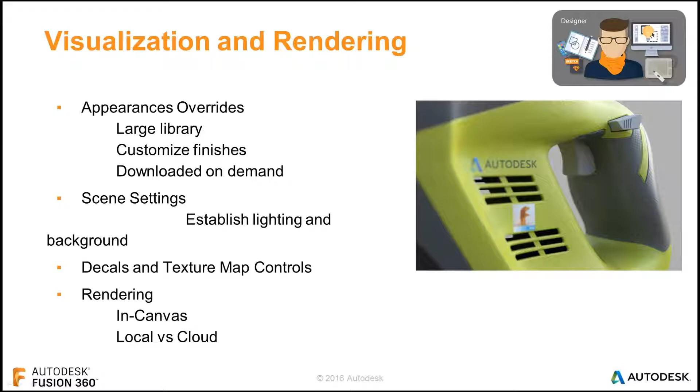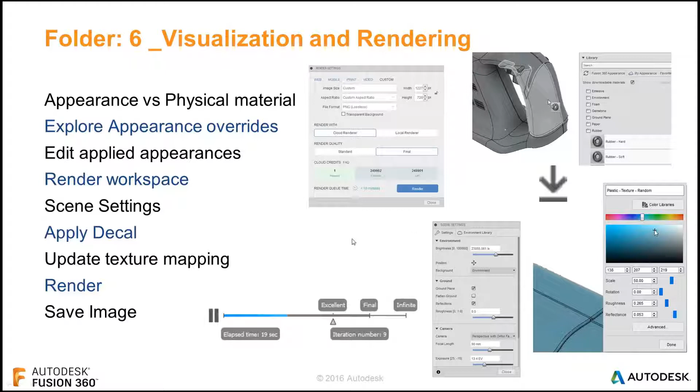So what we're going to do now is a demonstration. We're going to look at a model that's already been done, and play about with some of the settings to really show the various capabilities of Fusion. Again, once you know where to go, it's a case of having a play and finding your own best techniques.

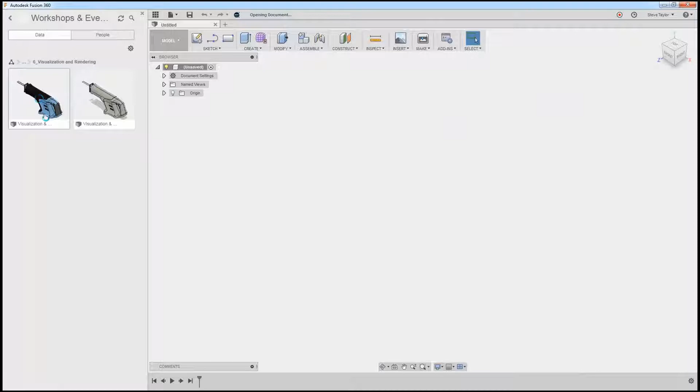So we go back into Fusion again. Because I save my model, it's actually saving it on closing. Now I'm remembering to go into this tool—if I go into visualization and rendering, I want to load up the blue one, the visualization and rendering one in blue. Actually, I've loaded the wrong one—that's the finished one. I'll load up the unfinished one instead, I think that's a better way to show you.

So we look at this model. Notice we're still in the sculpt environment. There are two different ways of looking at it. If I right-click in the canvas, I have the capability to add physical material and appearance, and go on to the texture map control.

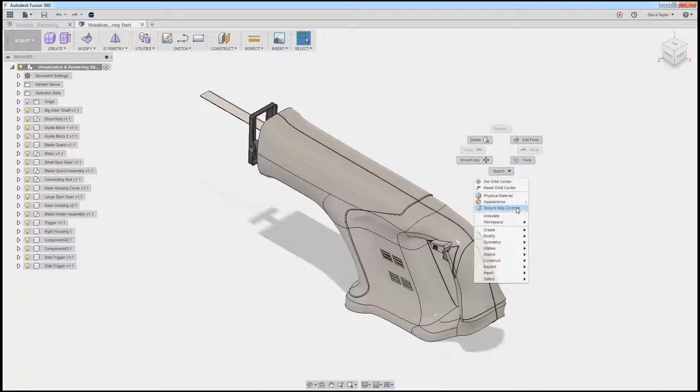So if I go into appearance, I get a pop-up box—sorry, it's come up on the other screen. This tells us all the different materials or finishes already within this model. I've got a wealth of libraries here, whether it's glass, metal, or plastic. So in plastic, I've got opaque, texture, translucent. Let's open these up.

If I want any of these, let's say this plastic one, I bring it across. You'll notice up at the top it says bodies and components, which is highlighted. If I bring this across, because it's got the bodies, it'll actually drop it and put it on the full body—this is only in appearance. Let me undo that.

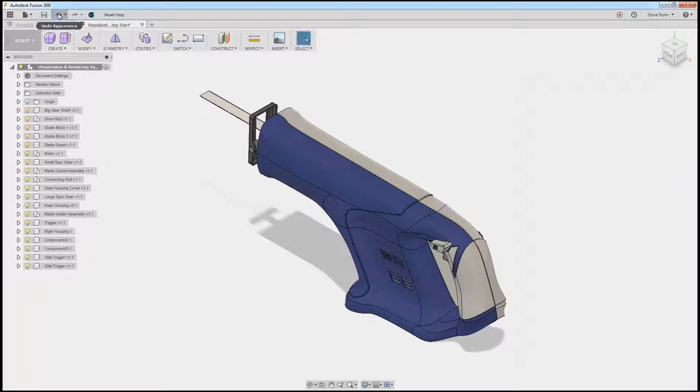Right-click, appearance. If I just select faces and do the same, you'll notice now it's just applying to individual faces. Now this is an appearance override—it doesn't actually change the physical material of the model, it's just how it looks on the screen.

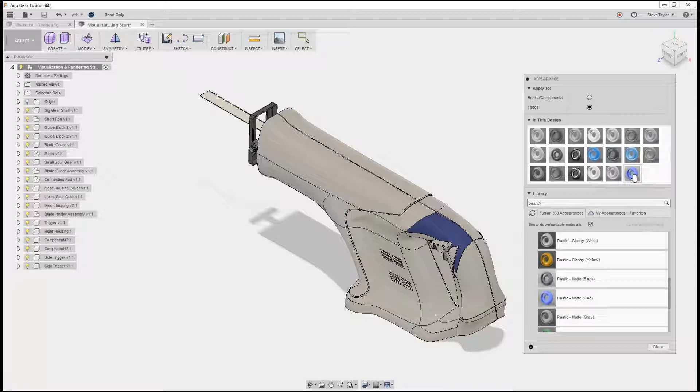But this will start to build up in the in-design library. So if I add in, let's say, that metallic blue, just in that corner there, you'll notice it adds it in here—the matte blue, should I say. I can double-click on this, and you'll notice that's great, split over my screen—there we go. Let me move the model across a bit and double-click on that. What this allows us to do, since it's an override, is change it by grabbing.

We can change it, and you'll notice the actual model itself changes as I'm dragging along. Anywhere that I'd had this material selected to, it would change there as well. So there's a lot I can do in there.

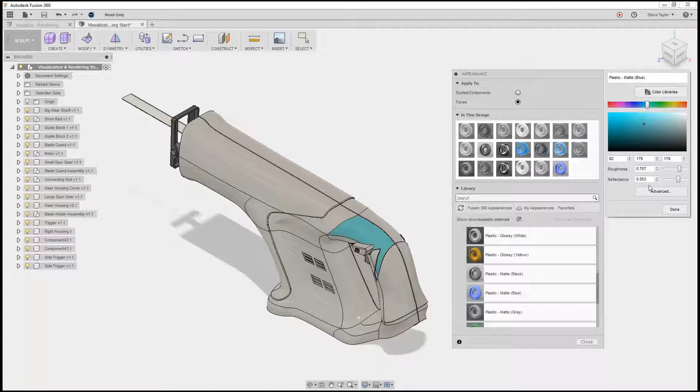I can go to advanced, and I've got a lot more options. I'm not an expert with all this, but you can see you've got very emissive products - we'll have a look at that later on. There are relief patterns, cutouts, advanced highlights. There's a lot you can do in there and apply to the model.

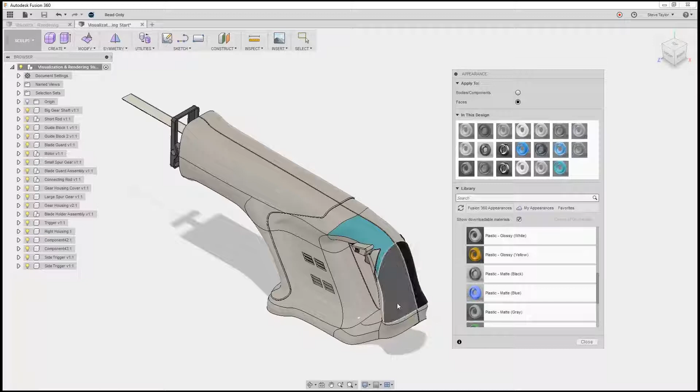Now what I'd like to do while I'm in here is get the hard rubber - somewhere there's a hard rubber. There we go, this hard rubber. I'm just going to drop and put it on that one. So I've got a nice hard rubber there. It looks okay, but I'd like to make a few changes.

If I double click on that in the menu, from here you can now access the material and make adjustments to it. So maybe I want it a little bit lighter. In here I can actually change the lightness of it, so I can scroll down and see how it's changing the lightness.

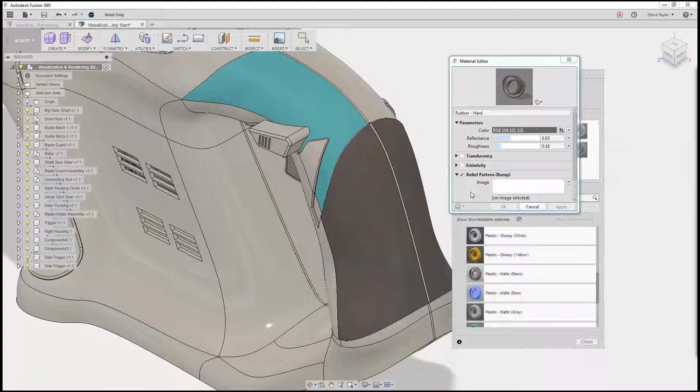Also, I can go into advanced and select add bump map. So if I double click on that, go to advanced again, this time if I go to bump map there and open it up, this brings me to my folder. Now these will all be shared with you - the access to the folders for the logo, the saw, the background.

This grip bump map is an image that's been taken off Google. If I open it, it's now put it in, and you'll notice - let me just open this a little bit higher so you can see it - we've got our image in there. You can change the scale and rotation of it.

So as we're looking at our bump map now, let me find where it is - it's in the actual image itself. Whilst we're in here, we can change the scale of it, the offset, the rotation. So if I want it at 90 degrees, let's put it in there. As we modify it now, we can change the angle of the bump map.

We can change the scale of it if we want to. We can highlight it, so you can get a really good sort of effect. It's really easy to create some materials and build out the visualization of this model, so there's quite a bit of stuff you can do here. Let's say if I was to change that to 50 - there you go, let's scale it up.

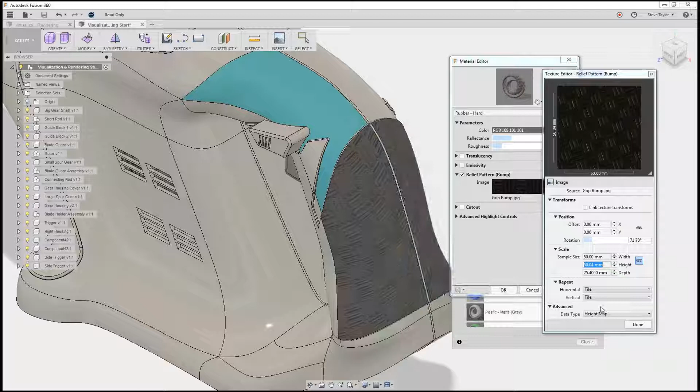Again, it's something you can really just play about with. I could spend hours and hours - I don't want to spend hours and hours, but I'm just showing you how you can do it. You just apply, I cancel out of that, and we've now got that bump map on there.

Let's have a little fun. I'm going to click on the other library - there are a few different libraries here. So while we're here now, libraries.

Whilst we're in here, I may as well mention it to you - we've got the Fusion 360 library. You can create your own and include them in there. And if you've got some favorites or ones that you're always using all the time, you can actually place them into the library themselves, so you've got access to create your own series of libraries for the products and materials you're using on a regular basis.

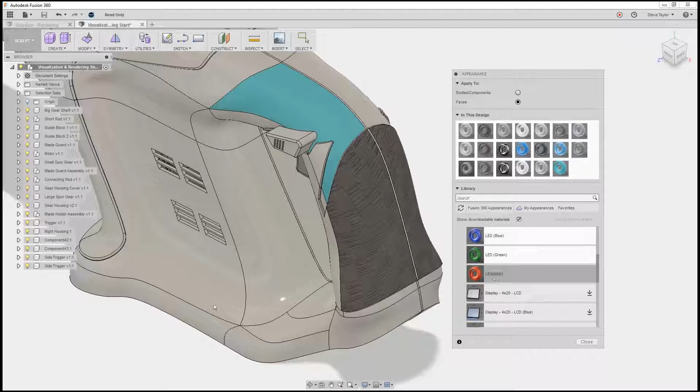What we've also got, if I look in here in the libraries - let's go back to the Fusion appearances, this time I'm just going to go to Other. You can see we've got quite a wide range. You've got emissive, so if you wanted to add something that was emitting light, you've got that possibility. Well, I'll tell you what we'll do - we'll just add, if I move around here, let's make this light here. I'm going to just drop that onto this.

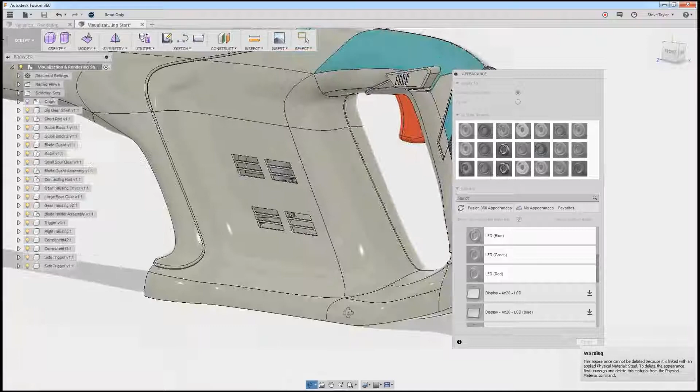Let's drop it onto - in fact, let's change that to bodies, components, and we can select all of the switch. Move, there we go. So that switch will now be an emissive LED light. If I want to go into it, you can see now I've got a different selection - I've got roughness, I've got how bright, the luminance it will be, so I can change that.

I've just set that light up there, so later on when we do a little bit of rendering, you'll see how it affects it. I'm going to go to wood as well.

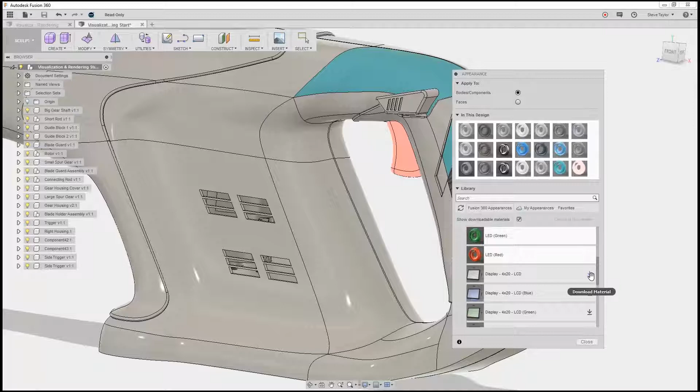Let's scroll back out. By the way, if you've got one of these arrows pointing down, that means it's not currently in your library to use, but you can download the materials into your library. So if you're after a specific material with an arrow down, click on it and it will download into your library.

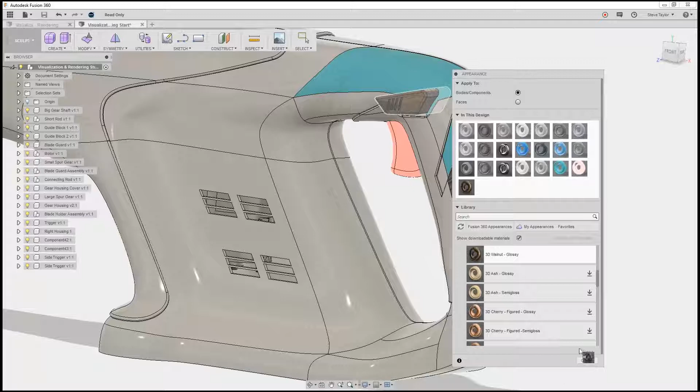If I go into wood, solid wood, let's go to finished, and walnut glossy. I'm going to put walnut glossy and drop it on that component there, that safety switch. Now if I zoom in, you can see how the grain follows the end. Looking on this side, the grains are following down, but as they go round, you're getting that end grain effect, which I think looks really cool.

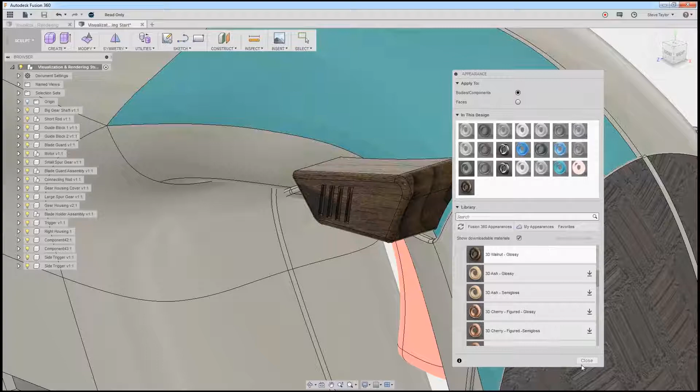If I close the appearance dialog box and click on the canvas, go to texture map. Let me close this. If I click here, right click, and go to texture map controls, I can now select the switch body.

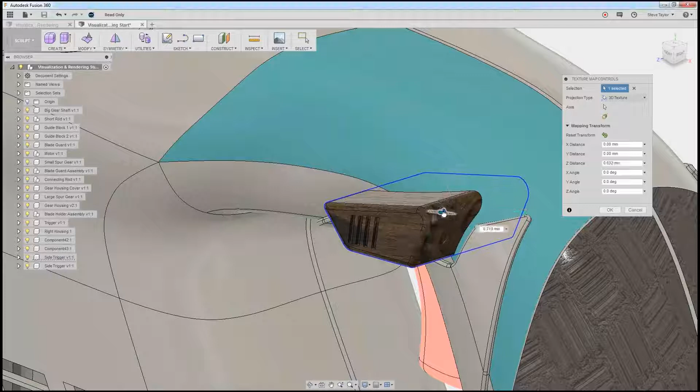I get these manipulator handles on, and what it allows me to do is drag these around. So if you start looking now, you'll see my grain moving along around, so I can position my grain.

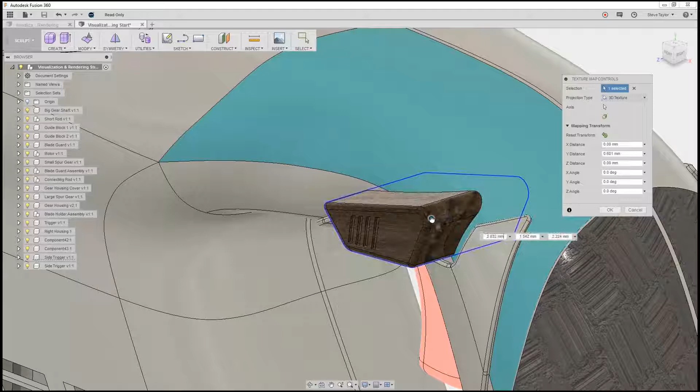I can zoom in and zoom out, using the same manipulator handles to zoom into the grain and zoom out. I can change the angle, spin it round. It's just a real cool feature within Fusion.

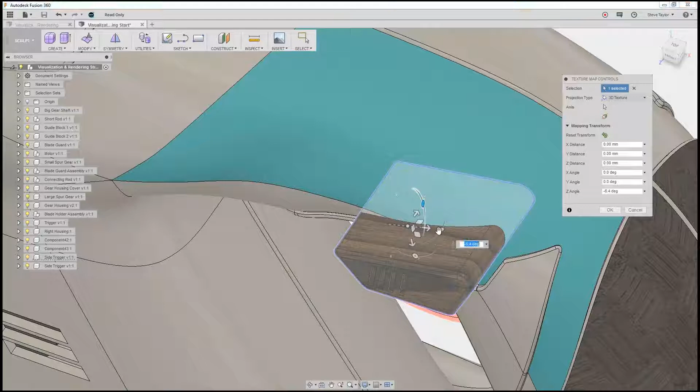It's just knowing where the tools are and how you can access them. There you go, spin it around and change it. You can play about with it and get a whole series of different effects.

If I want to change the scale overrides, I'd go back to the appearance dialog box, select the finish I want, edit it, and go through the different options. I think these effects are great and already adding to the appearance of the model, and we haven't even started the render tool yet.

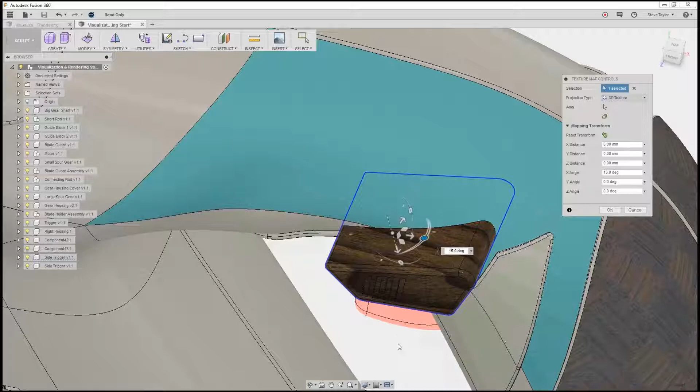I've still got, I'll tell you what we'll do. What I'm going to do now is leave that around there. I can actually build this up as we're going along. Let's dig into a few things whilst we're in the appearance box with Fusion 360. Let me open it up again, the appearance box.

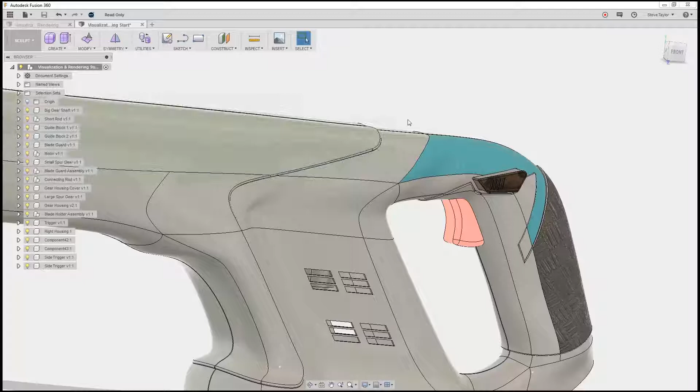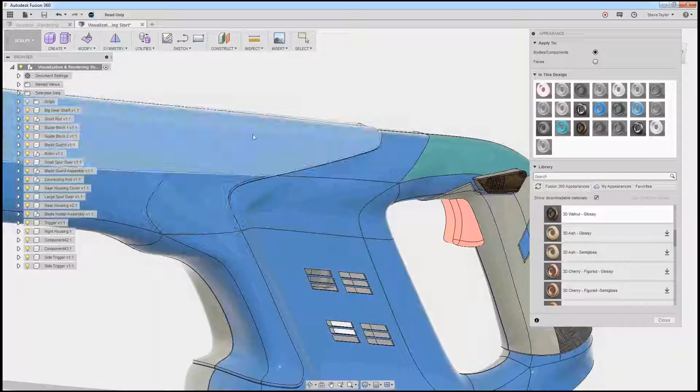In Fusion 360, we have a range of different selection types. We've got bodies and faces so we can apply appearances. If I wanted to apply this particular opaque to that body, I'll keep the rest of the faces as they are. Already it's looking pretty good.

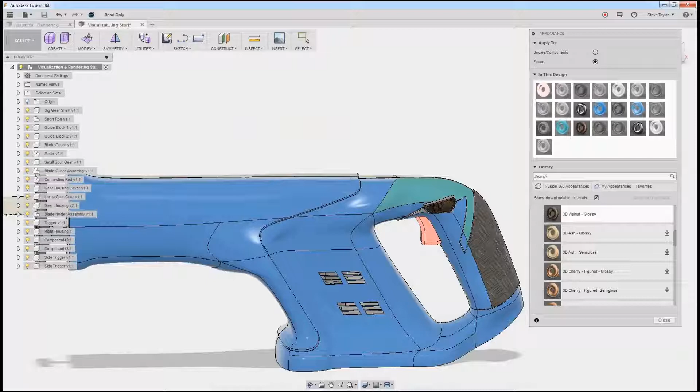If I want to just do it to that face, I change it to faces and then apply individual faces as I go along. So very quickly I can build up how my model is looking on this side, and I have to do the same on the opposite side. Depending on the type of model or body, we can simply select by faces or bodies.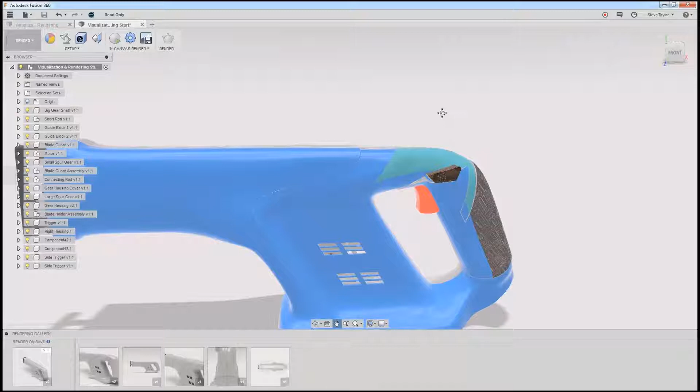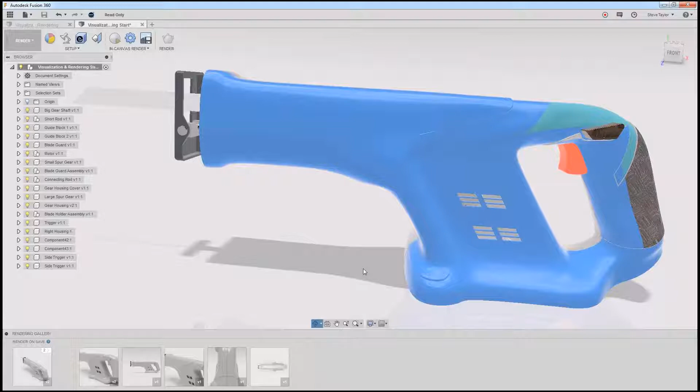Moving across from left to right within our workspace here, we've got appearance. Just like before, the same appearance box comes up. We've got access to it in this space, and as well, if we right click, we've got appearance there as well.

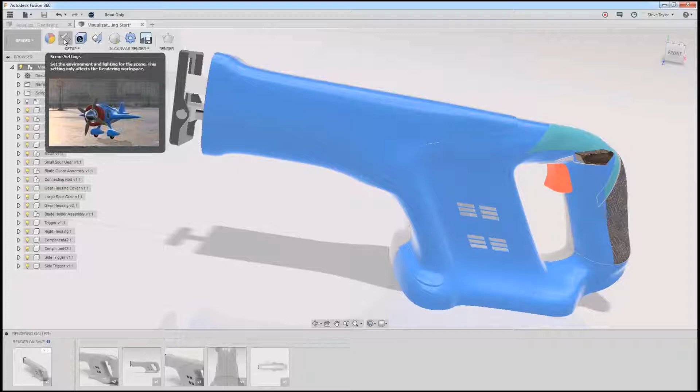Scene settings. I click on scene settings, and we get our scene settings dialog box.

What we've got here is the brightness. This is how bright the light is from the scene, so we can reduce it and modify it down.

Position - if you've got a particular scene, you can change how far your model is off or through into the floor, so I can modify that. I can also change the angle that the model is within the scene. Because there's no back scenery here, you can't actually see that changing, but you'll see the lights from above changing.

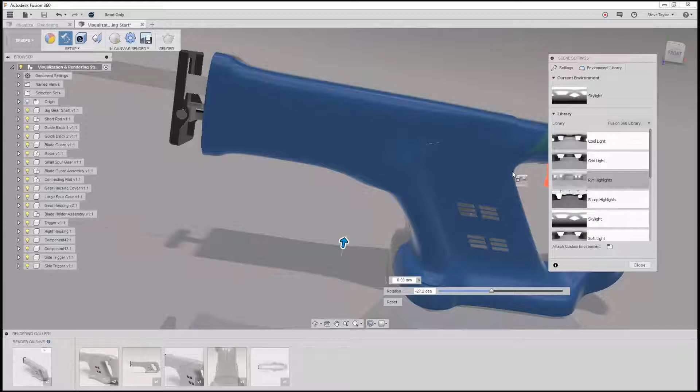Environment - at the minute we've got a background set to environment, which comes from the environmental library. It's set up initially as a skylight. We could change that to rim highlights, just drag it on and drop it, and it changes.

If I view around now, you'll notice my six lights from above have gone, and I've just got the rim highlights coming off. There's quite a number of these built in, but you can also download other ones if you want to put your model into a field. You can also attach custom ones, but they need to be the HDRI type of photograph if you want to do your own.

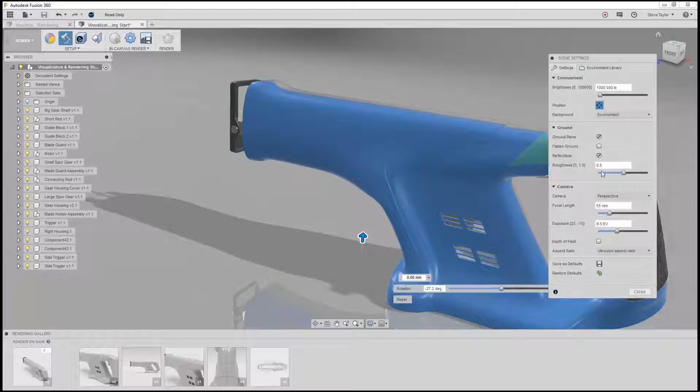We've got ground plane, and we can turn it on or off.

You can see you've got reflections, non-reflections - let me just turn that position off there. We can put it on the ground or not, turn reflections on or off, and then obviously change the roughness of the ground, so the clarity of the reflection you're seeing in the image.

Then we've got cameras, so we can change from perspective to orthographic to perspective with ortho faces - a number of different options there. Focal length we can change too. Now this is where it starts moving out of my comfort zone.

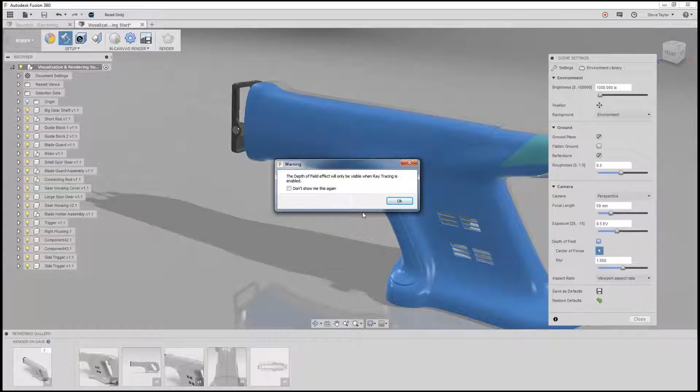Depth of field we can put on, so we can change the focal point of the depth of field, turn that on and focus on something.

Environment - where we've got the environment, we can actually change it to a solid colour and pick the colour. Let's just move this over a little bit so it comes on the screen. Select the colour - if I want a red background, apply, and we've got a red background.

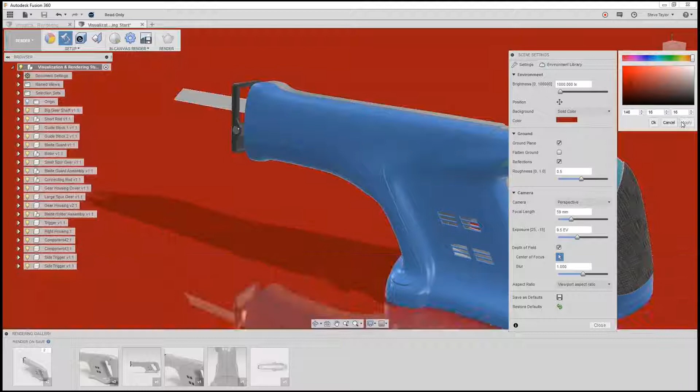So we can actually change and modify the background to our model. We've got solid colour, and we've also got the environment that we had in there.

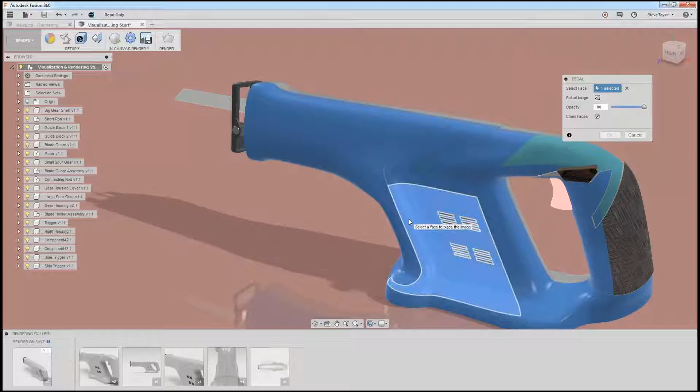Also decal, so we can add some decal onto our model. If I go onto decal - I think this is really cool - all I have to do here is select a face that I want my decal on. So if I select that face, select the image.

So for this one I'll just pick the Autodesk logo, open it up. Where has it gone? Ah, there it goes. And it's on - now look, it's our friends the manipulators again.

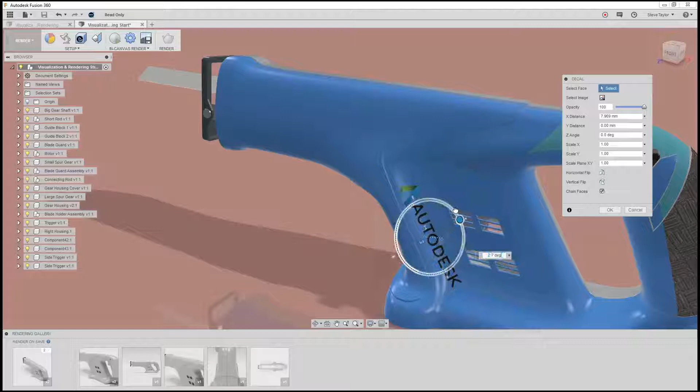So with the manipulators we can move it around that face, scale it, move it planarly, move it up and down, spin it round. We can put this wherever we want, position it when you're happy, and there you go - we've now got that image on our face there.

Texture map controls - so again we've got access to the texture map.

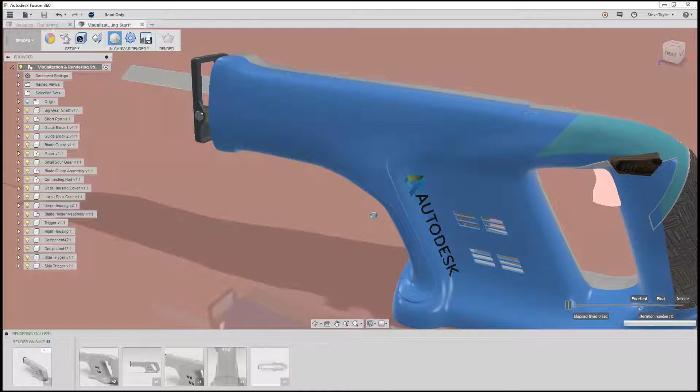In canvas rendering, this is what I was talking about setting things up. If I go in canvas rendering, this actually starts the render tool, and when it starts doing iterations, as iterations go it gets finer and finer in the outcome. You can see there's a time elapsed and the number of iterations it's done through the design.

Excellent is when we get to this point - we can pause at any time during the iterations. The only downside for me, obviously, is it's using a bit of computer memory whilst you're doing it.

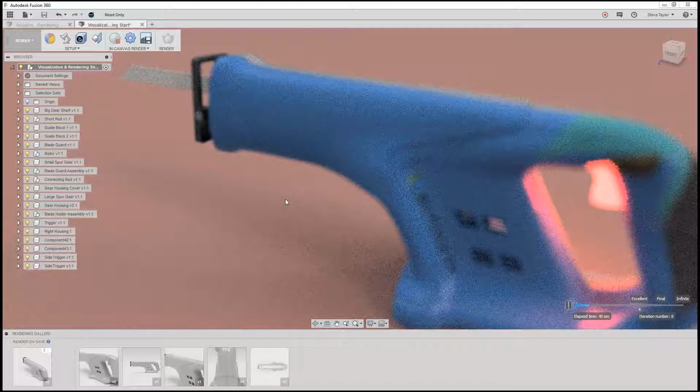But as soon as you modify your position, you can see the LED, the light coming through from the LED. If I was to move the position of the model, it starts again - so zoom in, zoom out, the iterations start again, turn it around. I can pause, but it will pause in that position.

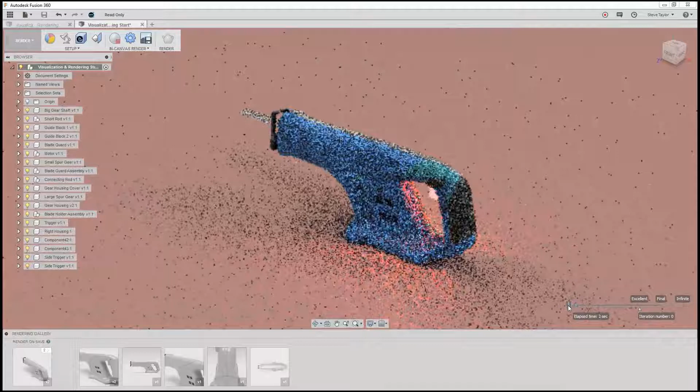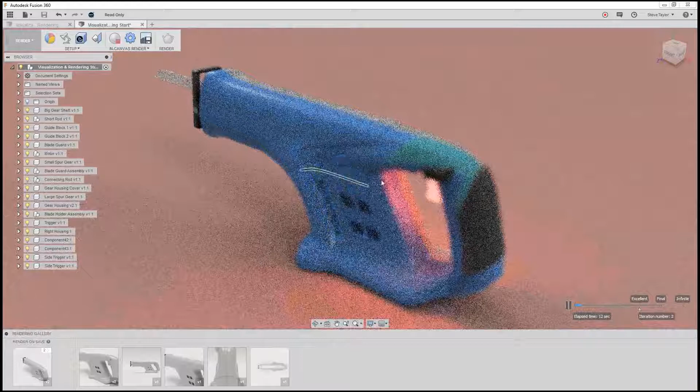Pause it, come and do what you want, and then it'll start again. But depending on your model, how complex it is, and how fast your machine is, this is great for setting things up. I might actually go back and reduce the brightness of that on switch if I had time. So I'll turn off the in-canvas rendering.

We've got in-canvas rendering settings here. We've got fast, so it's a quick way, or we've got advanced where we can set things up. We can lock the view in there, same as we're doing it, to make sure it's giving us what we want. At any point while we're rendering and doing the in-canvas rendering, we can capture the image that's on the screen.

Again, this image here is not a rendered image, so there's a lot of adjustment we can do. Before we can actually do a final render, we need to remember that these exercise files are read-only, so we need to save our own version to a project. This won't actually render or produce that final rendered image unless we've saved it. So we go save as, just save, and that will now allow me to complete my rendering.

So if I go to render, the render dialog box gives me a few options. I can do a cloud render, which uses credits, or I can use a local render. We'll use local render. I can set the quality, standard or final. I've got advanced settings, so I can actually change it to excellent if I want to.

I can do it locally using my processor, or I can switch to cloud render. The cloud render will tell me how many cloud credits are required to do a particular image size, and I can just then tell it to render.

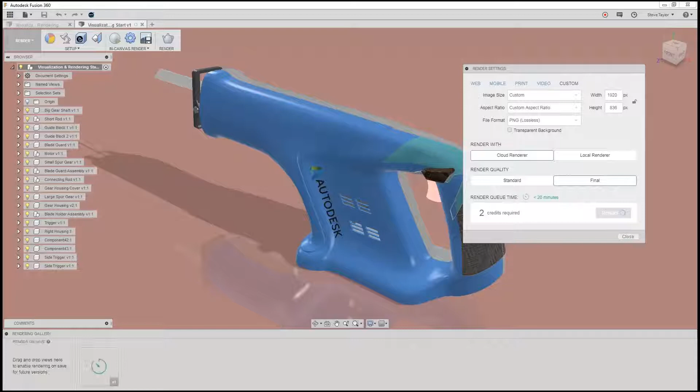Once it's done that, and it started that render of the image, I can now actually just move and modify my design. It's not going to stop this rendering that's happening here. This will just go on now in the cloud and produce my rendered image. So I can position it, change it, modify it, change my scene settings, change the colors, apply, and then do another render.

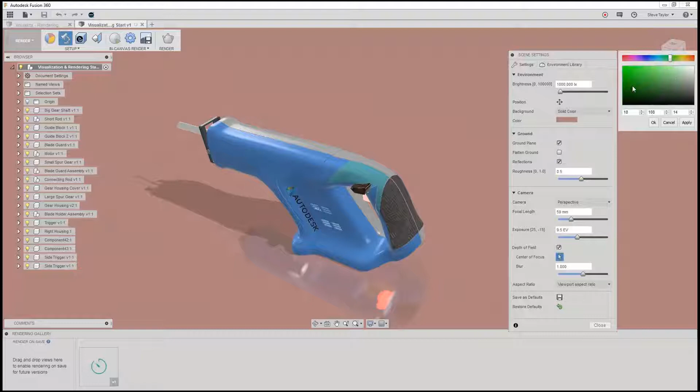So I can build up my renders, but if you're a student, you get free cloud credits. If you're an educator, you do too, but if you're commercial, you need to pay for the cloud credits. So I would only advise doing the actual cloud rendering once you're happy and you've got the final image that you want.

Even if I shut down my computer, because it's doing it in the cloud, it's still going to render it, and they'll present them in a nice gallery for me. When it's done, I can create a turntable of the rendering. So hopefully, as this is winding on, it will do one - I can actually do a turntable of the rendering.

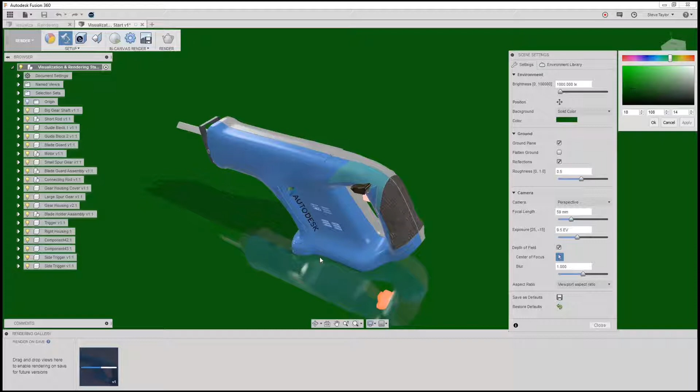Or if I've actually done a motion study on this particular reciprocating saw, I could re-render the motion study and produce a video. So only for those you've done motion studies with, once you've done the initial render, you can go into that render and ask it to re-render it as a motion study. At this moment I haven't got this set up, but I'll see if I can do a model for tomorrow that has a motion study so we can show you how to just click on it - it just gives you an option in the gallery.

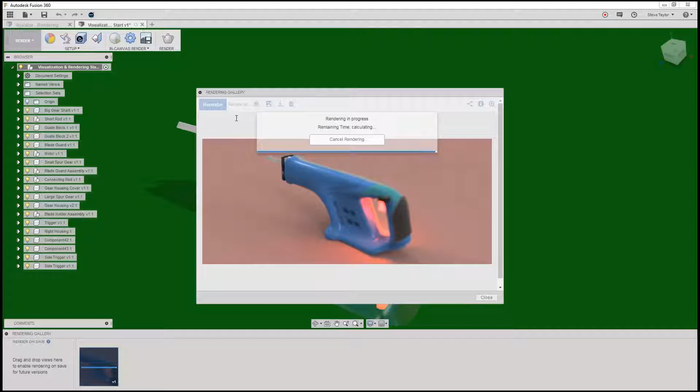Yeah, so it's not quite finished yet, it hasn't got that sharp image, but hopefully it will do shortly. As you can see up here, I've gone on it pretty quick so I can show you the icons at least. We've got the turntable option, and if it had a motion study connected to it, you'd have the option to rerun the render as a motion study.

Produce a nice little video - so there's a lot of flexibility. There you go, I can re-render it as a turntable, but it would use 5 credits, and it's telling me at the minute it would take like 20 minutes. You can download or you can delete. So a lot of flexibility, a lot of power, and simple to use and adjust.

One last thing, you can set the rendering aspect. If you find you are using these settings all the time, you can set them up as default. If you've got a standard setup or standard lighting scheme that you want, you can actually set it up as default in there.